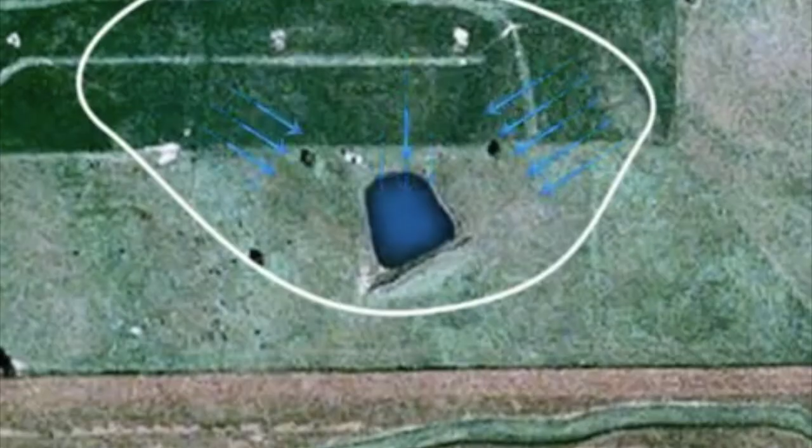So, wherever you live on this earth, you live in a watershed. A watershed is a drainage basin, any area of the earth draining into a particular pond, river, or lake. The watershed of this pond, for instance, is the entire area of the earth that drains to the pond. The watershed of the pond and neighboring watersheds combine to form a larger watershed for this creek.

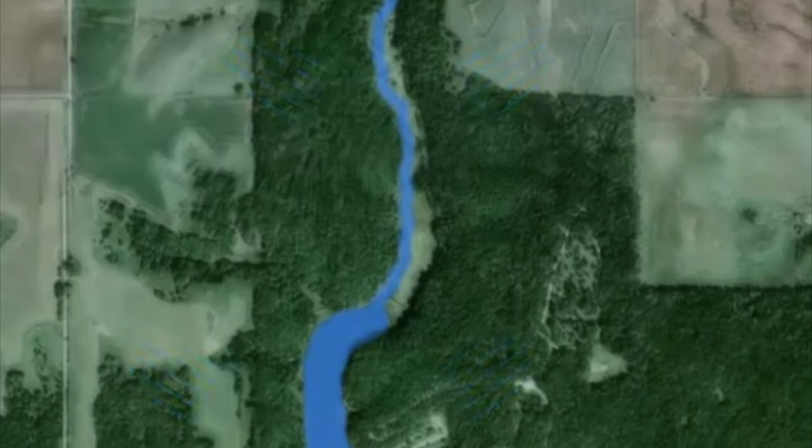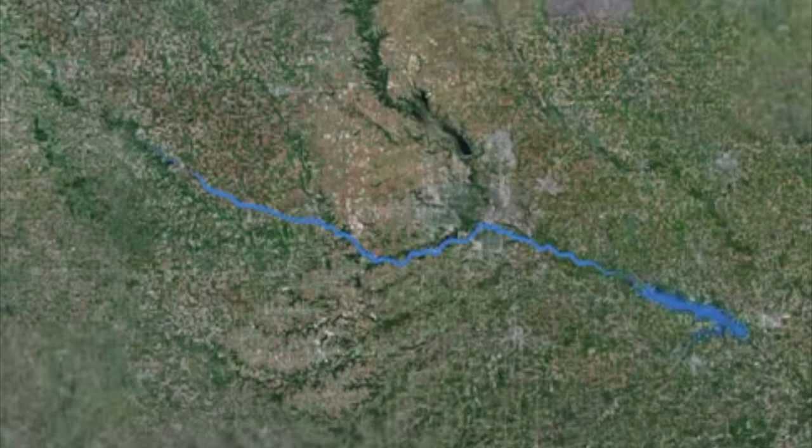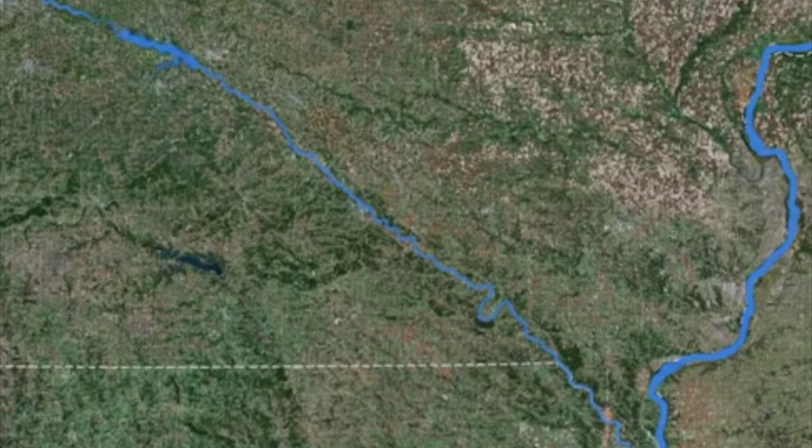The creek may then be part of a watershed of a small lake. It combines with other watersheds to make up the watershed of a larger river. That larger river feeds into an even larger river that has an even larger system of sub-watersheds. And finally, the ever-expanding system of watersheds becomes one huge watershed that empties into the ocean. But why should you care?

From farms to small towns to cities, people's lives are connected by falling rain and flowing water, and where it goes. How you care for your land affects how much and how fast water flows to your neighbors downstream, and how clean that water is. And the way your upstream watershed neighbors care for their land affects you in the same way.

For instance, if people upstream from you build houses, streets, and parking lots on the land that drains to your stream, you can expect more water to run off and at a faster pace, and your land is more likely to be flooded. Or upstream landowners who don't protect against soil erosion not only lose their soil, they dump sediment, nutrients, and other pollutants that affect everyone downstream.

Without proper conservation, there are downstream consequences such as flooding, stream bank erosion, sediment-clogged lakes, and pollutants in drinking water. But those problems can be minimized if each of us does our part to hold the rain in place where it falls. We can help water soak into the soil by planting grasses, tilling the land less, using rain gardens,

being careful of how much fertilizer we use, and doing many other things. But we each need to do our part. After all, we are all truly connected in a watershed, and we depend on one another to be a good neighbor.

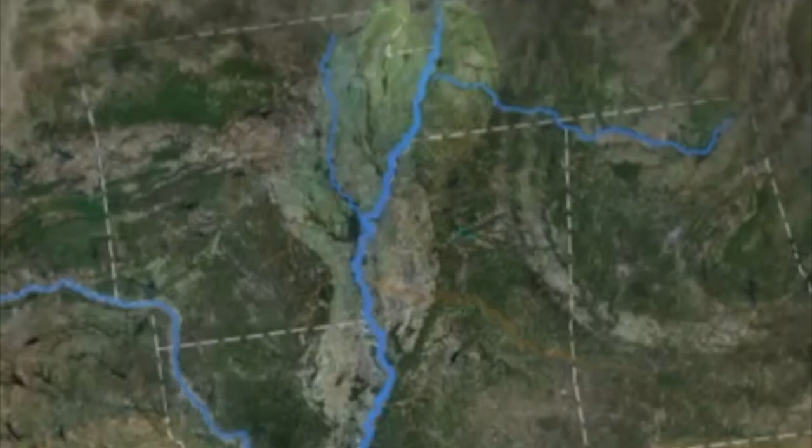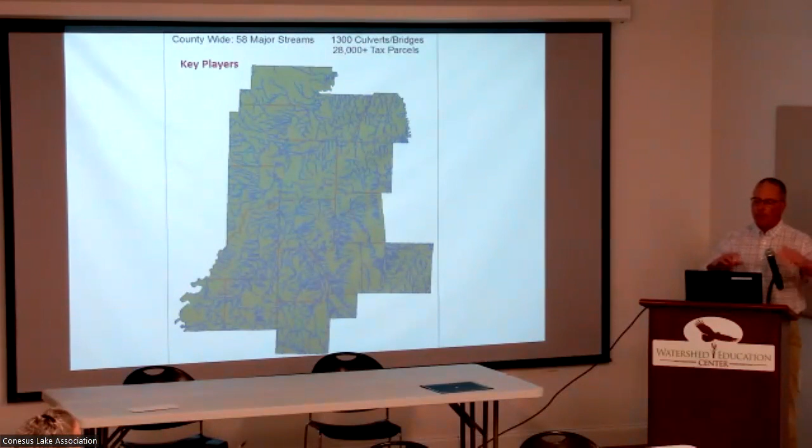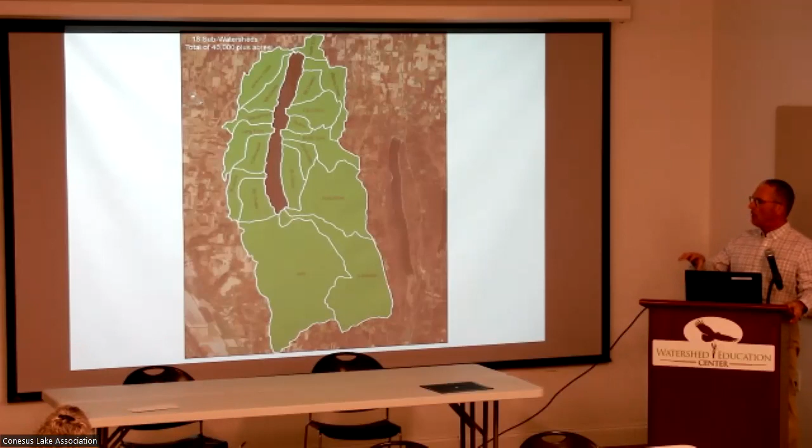All right, so from that perspective, everyone's in a watershed. What we're going to do this evening is focus in more and more, drill down onto an area to try and address the concerns within that sub watershed.

So before we do that, the key steps to getting conservation practices on the ground. These are the main ones that I've learned over my career. You want to be able to delineate the watershed. Think of that as the playing field. In other words, we've got to understand what is draining to this area. And then secondly, we need to identify all the likely players, landowners and infrastructure in particular, whether it's a landowner, a municipality, and then what type of infrastructure is there.

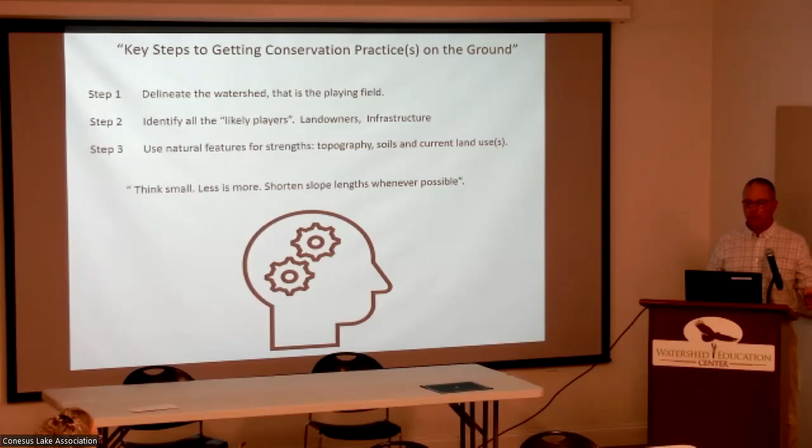And then the next would be the natural features. You want to use those to your strengths, your topography, your soil. What are the current land uses? And then always in the back of your mind, think small, less is always more. And we want to be able to shorten slope lengths whenever possible. Keep it as simple as you can and do those three things. Okay, next slide.

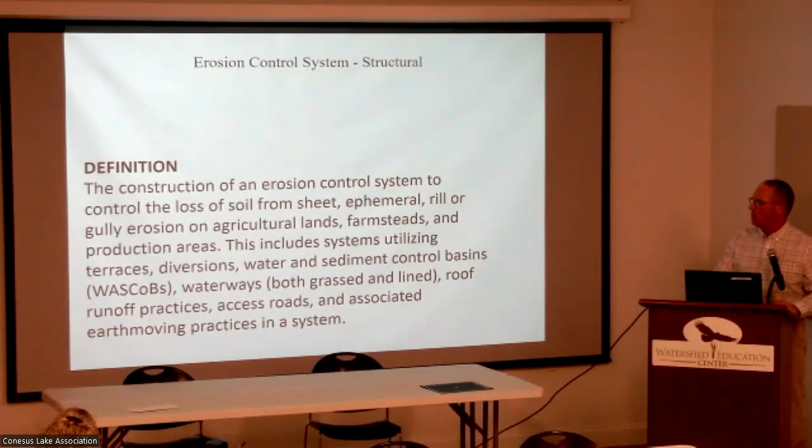So that leads into a real simple definition that we follow when we're implementing best management practices. For structural practices, which I'm going to be showing you shortly, the definition would be the construction of a control system to control the loss of sheet, ephemeral, rill, gully erosion. And you're going to see there's several different practices that we typically utilize. So there's a good definition.

Practices that we usually use on agricultural land are very similar to what we would use on non-agricultural land. They just have different names. The one that we, as a soil and water conservation district employee, would rely on primarily is generated through the New York State Ag and Markets. It's often updated over the years to make improvements, and that's provided here. So we've got a big toolbox to use, and we're gonna need all those tools.

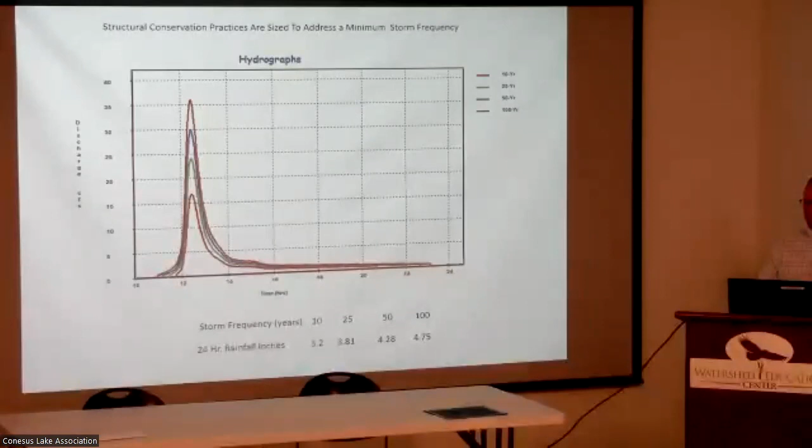Okay, backing up just a whisker. When we do practices, we always talk about storms, or you'll hear, wow, that was a 50-year storm, or that was a 100-year storm. I put up this graph just to give you an appreciation of what they mean by storms and what that would mean for a practice and how things get sized.

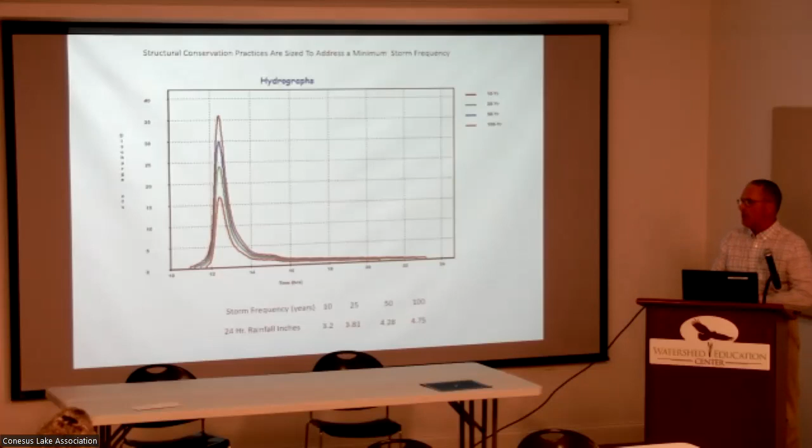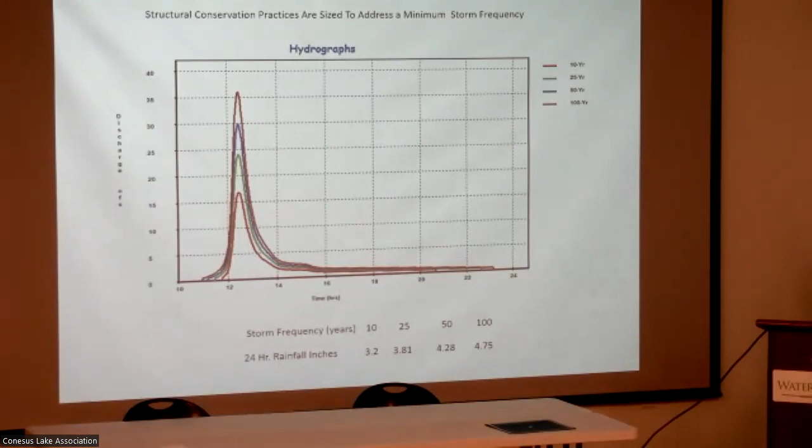For the practices that I just listed, most are set to be built to a 10-year storm event. And when you look here, a 10-year storm event would be the lowest curve here. So you can see the lowest bell shape here. This cursor works. Guess it doesn't work on there. So if you can see the lowest curve, and then the next green for the 25, blue would be 50, and then the brown is the 100-year storm.

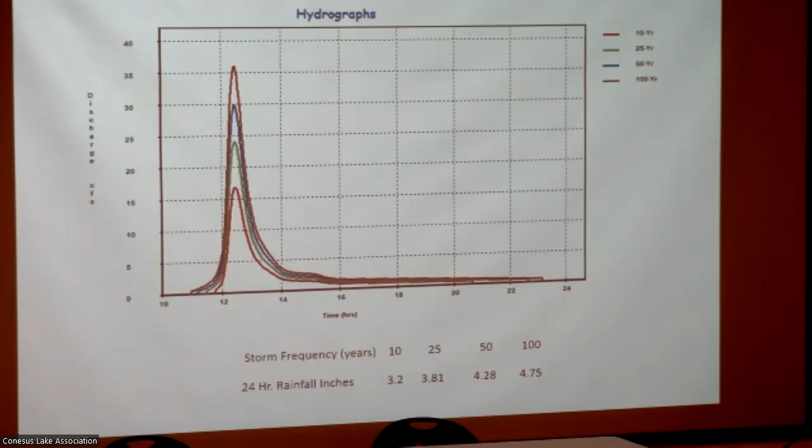Putting that in rainfall, we look at it in a 24-hour time period. The 10-year storm is about 3.2 inches of rain, all the way up to 4.75 inches for a 100-year storm. So that gives you an appreciation for the sizing of things. Again, practices are built to a minimum of a 10-year storm. A lot of the ones that I'll show you this evening, due to proper placement within the watershed and working with the landscape, some exceed the 100-year storm size.

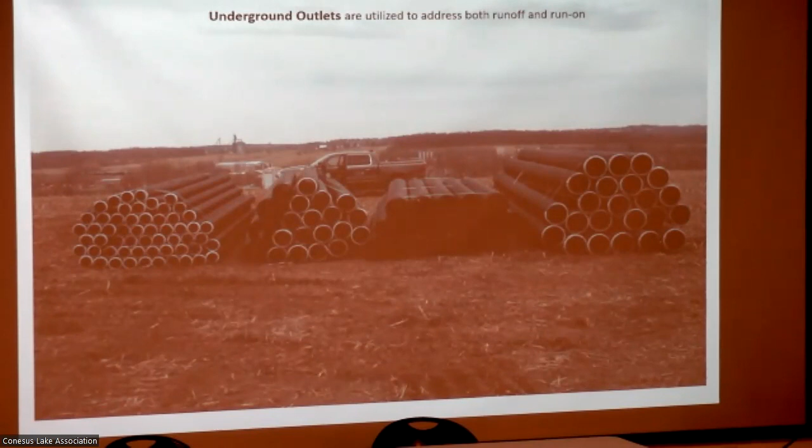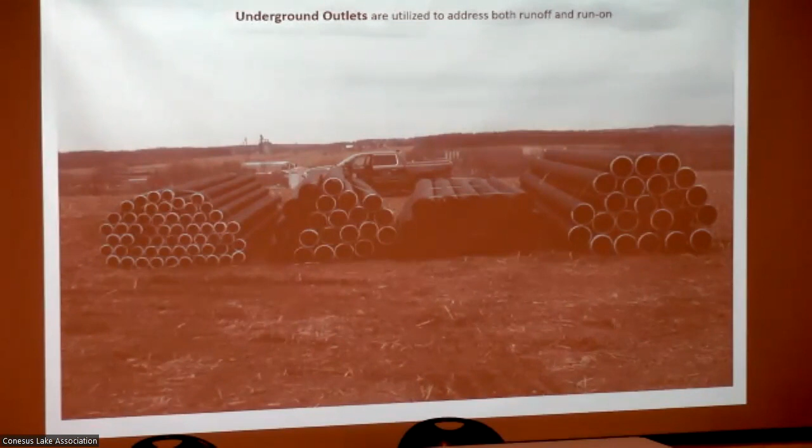Okay, so getting back to that underground outlet that I pointed out, when we talk underground outlets, we're talking drainage tubing. It comes in various sizes, 4-inch up to, you can get 5 foot. But typically, we try to minimize the size and get storage on the ground. But this is typically what we would have on a project. And then also that underground outlet needs a stable outlet to flow to. And that's for the low flows from structures that we're going to construct upstream.

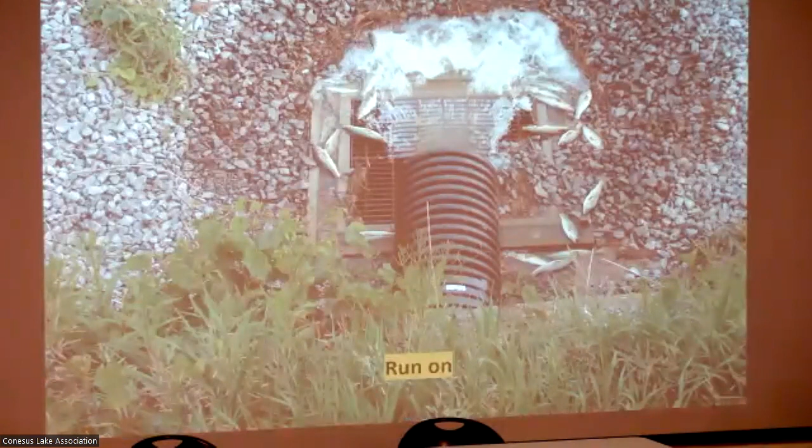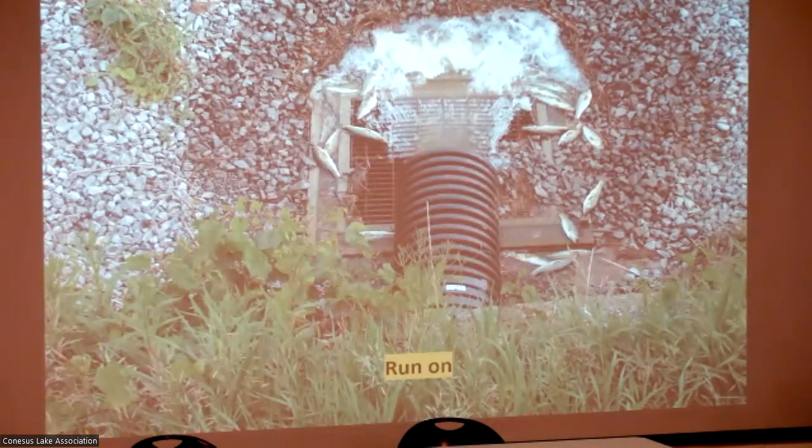I also mentioned the other importance of underground outlets, and a lot of times we don't really think of this, but it's key, is to address run on. In other words, when we have an opportunity to work with landowners to implement practices, where we are located within the watershed is often limited. We can't get as far up into the watershed and start construction as we would like, and that could be for various reasons. There's restrictions, infrastructure, there's non-willing participants, or the land use just doesn't fit it.

So this is a good shot, a real example. This was on Long Point, a practice where we installed a series of water and sediment control basins, where during the construction we had to identify and address run on to the property. So this is after a large storm event. I think it was like a 25-year storm event in the middle of the summer about 5 years ago, where we got a big thunderstorm and it dropped a few inches of rain. And this is the run on that we intercepted prior to it getting onto our footprint of watershed. And we were able to protect the structures that we built. And that's just another picture of that shot there.

So these smallmouth bass were located in a farm pond up above in the watershed. And the intensity of the storm was significant enough that the pond overflowed and all the fish went out. And unfortunately, we intercepted them at our basin.

So next we're going to move over to the northwest side of the watershed, the Conesus Lake Watershed, into what's referred to as Hanna's Creek sub-watershed. And if you were to look at an aerial and break that particular watershed out, this is what it would look like. So when we look at this, we can see a couple of things. We can see it's approximately 1,700 plus or minus acres of drainage way that naturally flows to the north to the outlet portion of the lake.

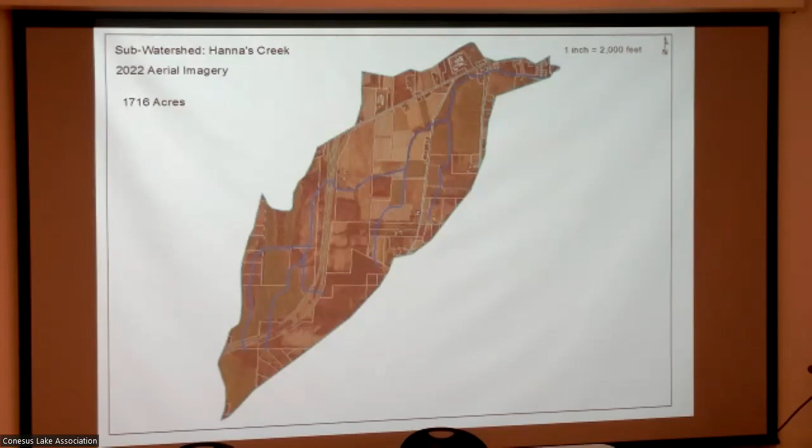And then you can also see on here that it's not a highly intensely developed watershed. And there's probably, I didn't count them all, but there's probably only, say, 30 individual tax parcels. What we're going to focus in on is the upper right-hand side, two particular tax parcels. If I had a pointer, I could point to it. But we'll be looking at these particular two tax parcels right in here, this area here.

And the participants were Deer Run Winery and Dairy Knoll Farms. These two particular landowners, farm operations, cooperated together so that we could address approximately 40 acres of drainage that they couldn't control coming onto the highest property, and then the additional acreage of the watershed between the two of about 70 acres.

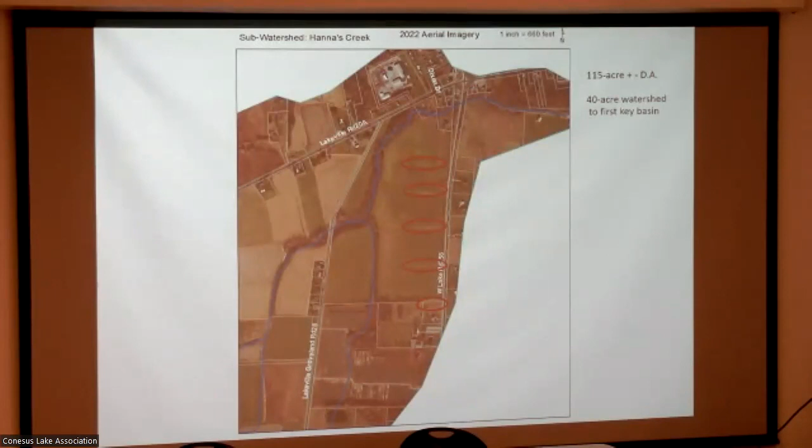So this is a snapshot of that and where our practices are going to be located. The practices are within the red ovals. So in the southern portion, we have our first basin, and then there's a series of 4 additional basins. Okay, so that gives you an idea of where we want to implement things.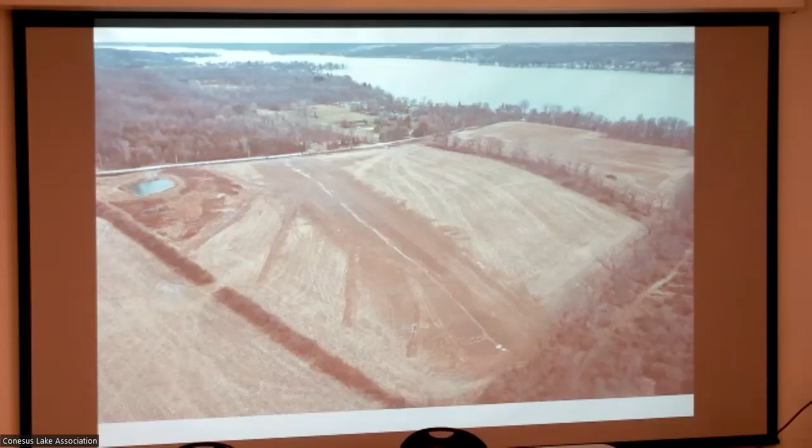And again, there is an underground outlet taking low flows. There's two standpipes in this terrace diversion structure, about a third of the way in on both sides, and they slowly release the water safely down into the stream. Okay, just a little reminder to drive home the point. We have tools, lots of tools, and we want to use all those tools. We don't want to just use one. We want to be able to use them all because in combination, they ensure the longevity and the performance of the practices that we're installing.

What we've seen up to date are structural types of practices. So now I just wanted to point out we have a couple of agronomic tools. We have alternating strips of crops. In the forefront is clover that was frost seeded into winter wheat. So we have alternating harvest times, and we have continual coverage on the fields. That is one tool that is utilized routinely, not just in the watershed, but across the whole county in agriculture.

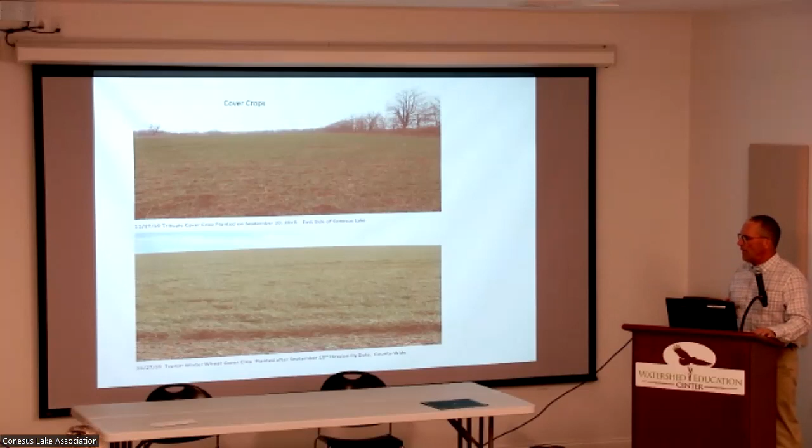The other thing I wanted to point out is more types of cover crops. These are particular ones that we work with farms on, and they're dated back. For this one, triticale, I wanted to just show different varieties. So there's triticale, which is a hybrid of wheat and rye. And then we also have winter wheat planted after harvest there. So, okay, that was the Northeast Creeks.

We're moving around. When I put this presentation together and ran through it a couple of times, I thought, yeah, I guess we did get around. We didn't just stay on one side, so I'm actually happy that I was able to show you numerous locations within the watershed where we've been able to get practices installed. So next we're going to move to the Webb farm, Bob Webb's farm. That's in Densmore sub-watershed, and it's highlighted with the arrow here.

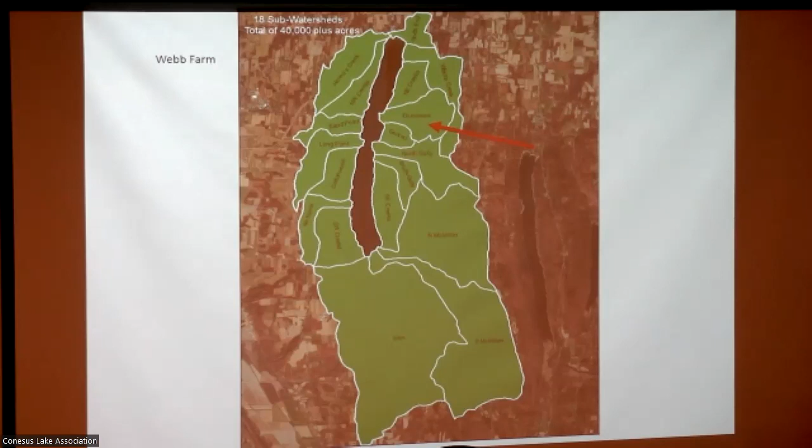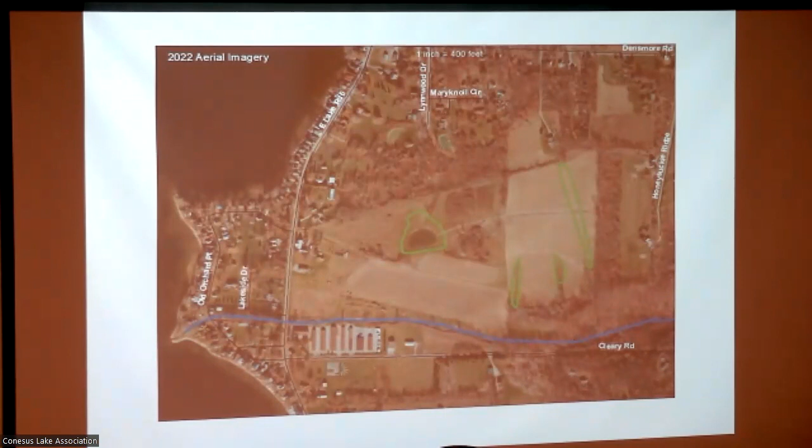Okay, so we've worked with Mr. Webb over the past 9 years, implementing best management practices. This is an actual aerial from 2022. I've highlighted a series of structures, and I also point out that alongside the southern portion of his farm, we've installed 2,000 feet of a grass field border, stream border. So I'm going to run through these with you. The stream runs alongside naturally, and the watershed is much larger. It runs alongside the southern portion of his property.

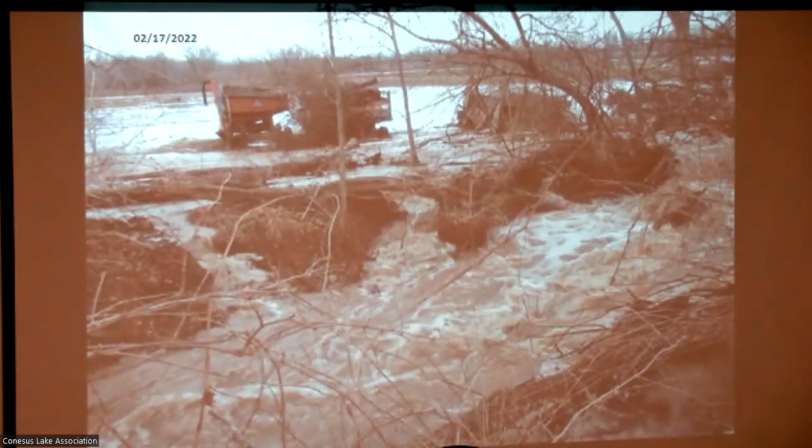And then this was back in February 2022. We had a very significant storm event. I apologize, I don't remember what size it was, but it was definitely more than a 25. This impact was caused by obstruction within the corridor. It didn't have anything to do with the farm itself. It was more the watershed above and obstruction accumulating over time. So I wanted to point out some of the practices that we utilize are obstruction removal and establishment of a border. That border lets the stream naturally breach its banks instead of backing up and then cutting and eroding a new channel elsewhere. It also allows access over time to remove accumulation before it becomes an issue.

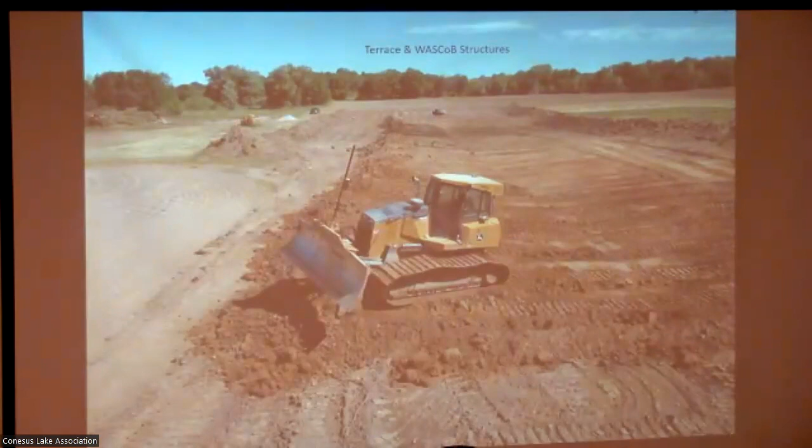Okay, so when we began work on the Webb farm, we first started with a series of 2 smaller water and sediment control basins. And actually, this is a photo of how those basins were constructed. Again, we strip off all the topsoil. You can see it pushed off to the sides about 40 feet out of the way. And then typically with a dozer, grading and shaping is established and an underground outlet is installed to collect and carry away the water at a slow rate.

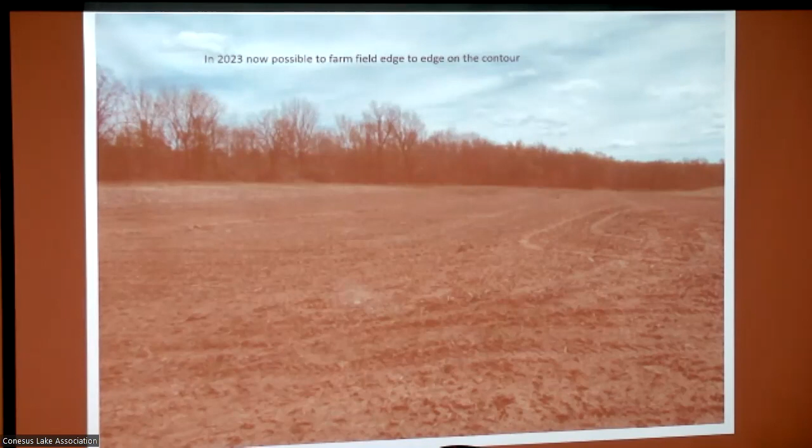And after accomplishing those, what we were able to do is in 2022, we installed a large terrace system from field edge to field edge, and it'll show clearly in the next photo. But that made it possible to follow the entire contour. And this next picture will show that, or I can point it out.

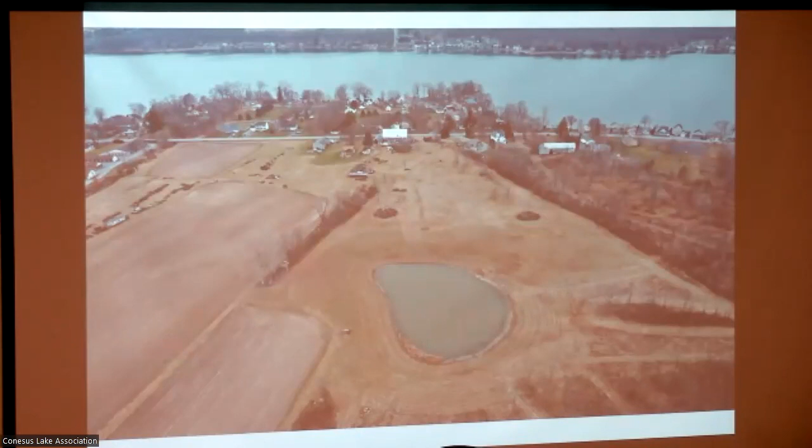Okay, I want to zoom in on the pond now. The pond is more than just a pond. And when you look at the pond here, this was constructed a few years ago. We did utilize some cost share assistance through the Conesus Lake Watershed program. And we were able to install this stormwater detention basin above the pond.

The pond itself was constructed because we needed earthen material to create the large temporary storage area to alleviate runoff impacting the point, and then all the houses down below, Orchard Point. So if you look at that, you can see the pond itself, and it's like a large salad bowl. So there's depth to it.

And then if we zoom in, there's also a series of 3 controlled outlets. Number 1 is really just a low flow, what we call trickle flow. It's a 4-inch PVC pipe that basically year round runs a very low flow and keeps the pond at an elevation. Number 2 is a larger 12-inch standpipe that during the normal 25-year storm event will start working because the area above the pond is filling up. And number 3 is the emergency spillway. And that exceeds the 100-year storm, where it's just natural grading.

So if we get to that point, the overflow will go as a sheet flow, and you'll just see it cascade down. When we get to that point, it'd be a very significant storm. So we're retaining over 2 acres in surface. So this is 3/4 of an acre, the water itself right now.

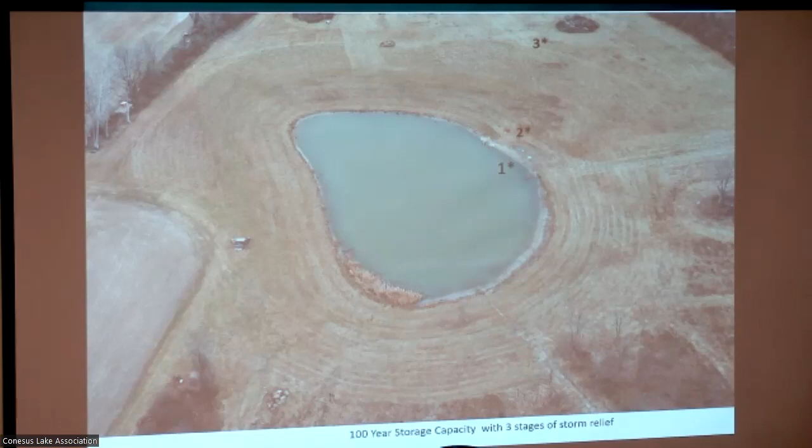Okay, this is just a picture of what the pond looks like in a normal growing season. And we're looking uphill to where we built the terraces, up gradient. The terraces outlet into this pond, safely discharged to a stable outlet. And also the smaller water and sediment control basins, they also safely discharge into this pond.

One more project I wanted to go through. I don't want to leave you with the thought that these practices can only take place on agricultural land. That's simply not the case. Most of these practices, it doesn't matter if it's ag land or not; if you have the footprint for them, you can install them.

I wanted to go over a project that we did with a municipality and landowner. And this would be in the Sandpoint subwatershed. So we would jump right across the street from Densmore. And actually, if you're at Densmore on the web farm, you can see this project crystal clear. And that would be on the McClellan Farm, Reservoir Road, south side.

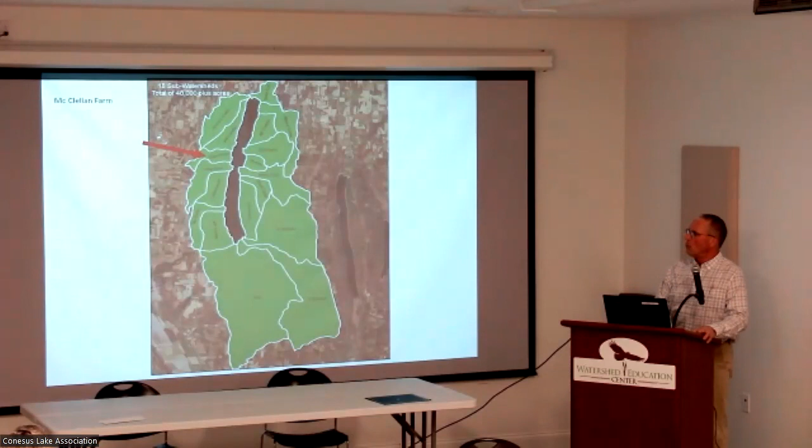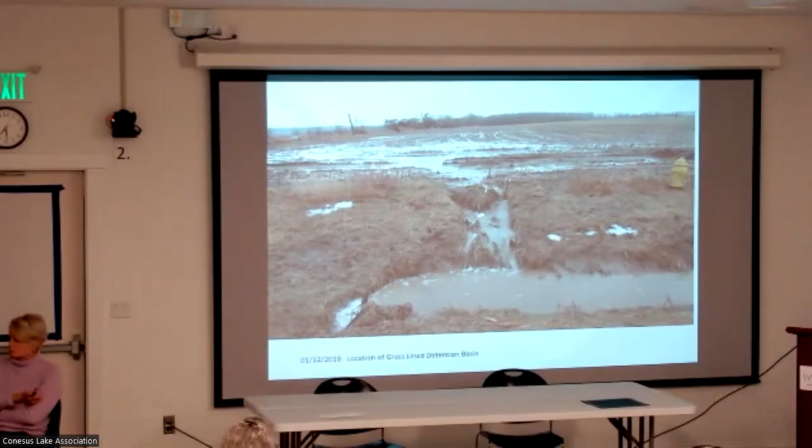This project is very visible from the road. This is prior conditions, and this is the location. This was back on January 12th of 2018. And it's the location of a grass detention basin or water and sediment control basin, but it's really acting as a detention basin.

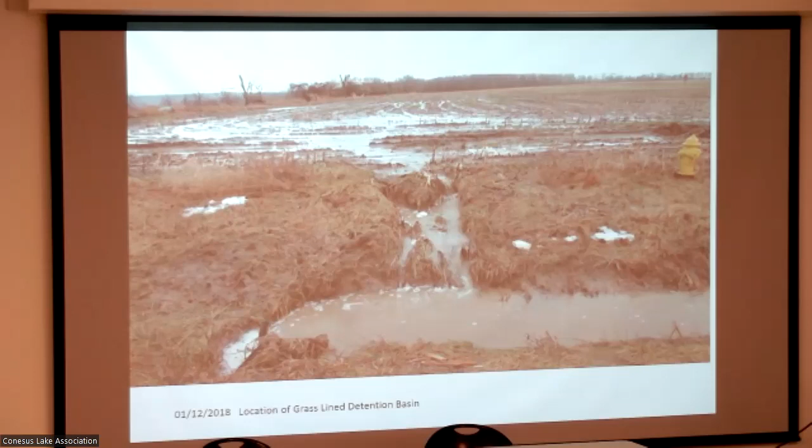Okay, so this is where the basin went in. This was in September of 2018, with the landowner, McClellan Farm, and then also the Geneseo Highway Department. We installed just over an acre. It's about a 1.1 acre detention basin, and that's been straw mulched.

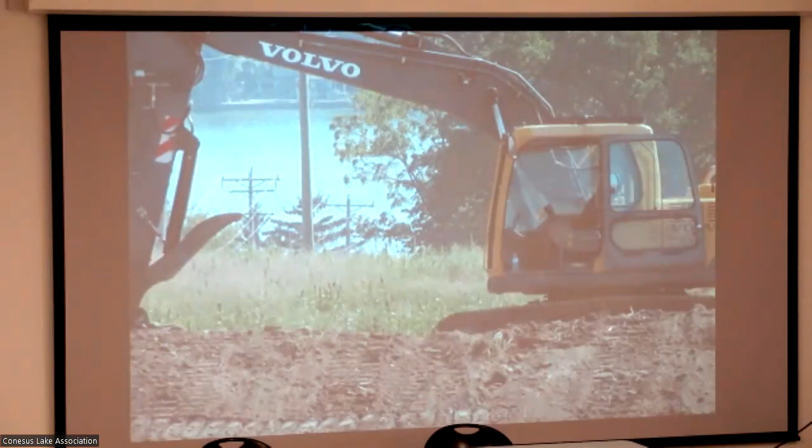And then this just gives you a perspective of how close that basin is to the lake. This is just standing on top of one of the topsoil piles and taking a picture. The excavator sits there, and then you can see the topography drops off very quickly, and then you can see the lake. So this is just that mulching close up, and again of the lake, and how the topography drops off fast, mulching establishment.

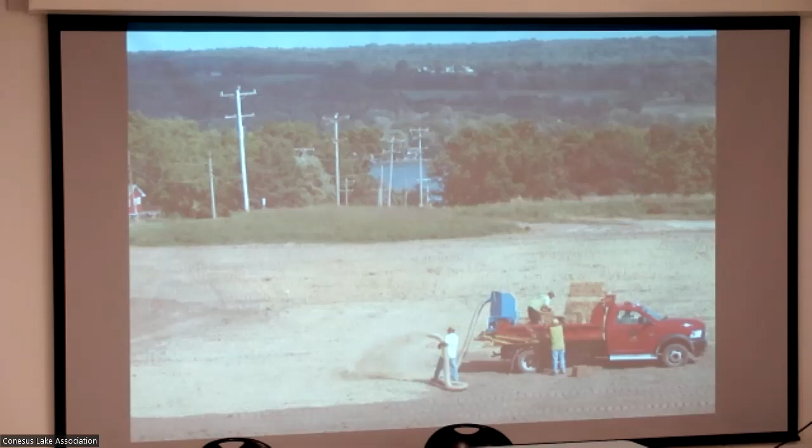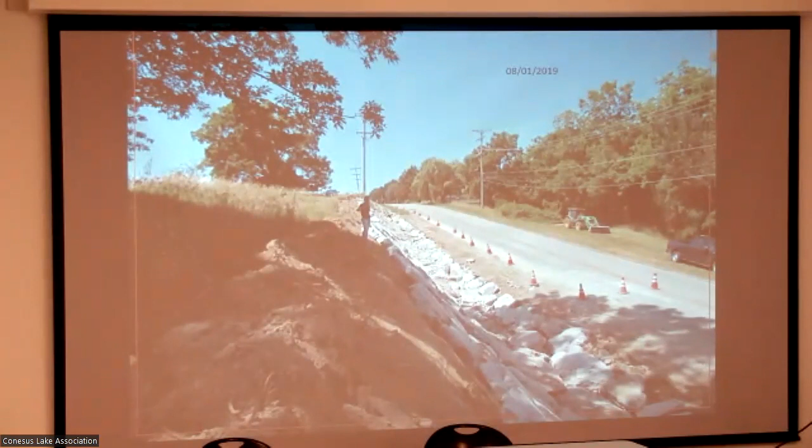So we have our basin installed, and just the way things worked out, now we're into August of 2019. We need to rock armor that very steep portion of the road to assure that the road won't be washed out by the water that's coming down there. We've slowed the water greatly, but we still haven't addressed the amount of water and the velocity that occurs due to that topography. So this is rock armoring of that road ditch to minimize or stop that from occurring.